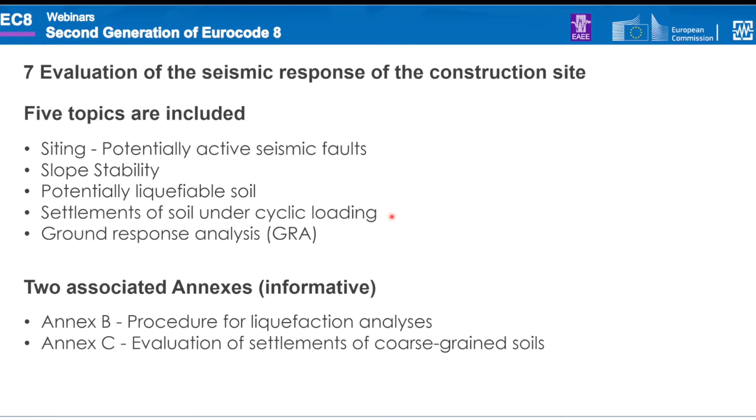So I start with siting, and I'm not going to read everything. This is a copy from version 2004. Skipping the principles, we have proximity to seismic active faults, which says buildings of importance classes 2, 3, 4 should not be constructed in the immediate vicinity of tectonic faults, and so on. But it just stops at that, and leaves it to the designer.

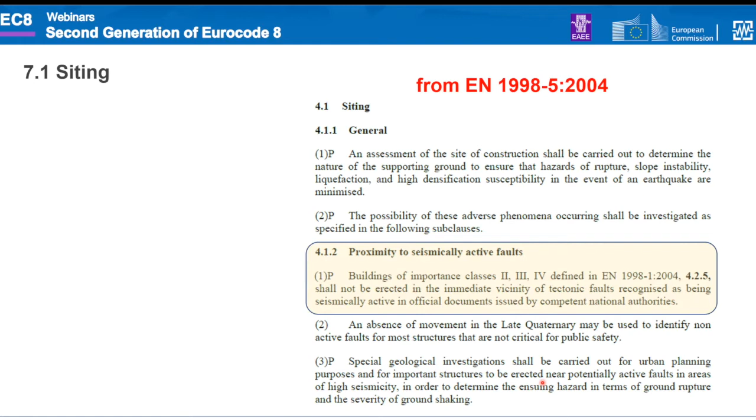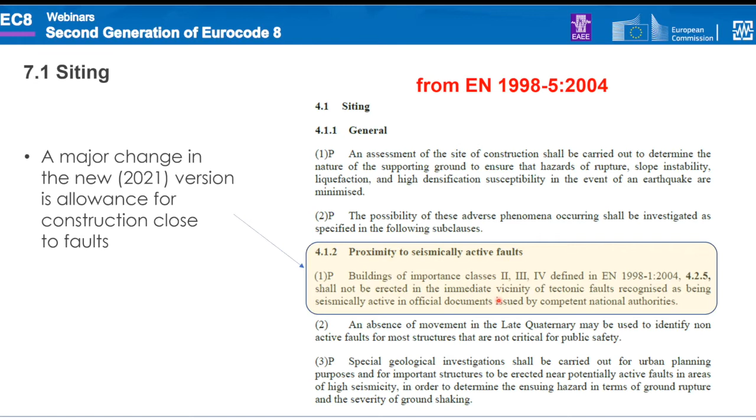There is a major change in the new version 2021 that allows for construction close to faults. One issue is the whole concept of active faults, which is the hazard part. This is dealt with in part 1 - what should we do if we are close. But that's the hazard part, the special seismic hazard studies and so on. Here we are talking about the foundation aspects of it. So what is done with respect to that?

Potentially active seismic faults - it says close to potentially active faults, roughly a few hundred meters. Structures of consequence classes CC2 and 3 may be constructed if there is a continuous stiff foundation and if there is enough soil cover. Then there is a table, a figure provided, with 3 curves, A, B, and C, each giving the thickness of the soil cover for low seismic action, moderate, and high.

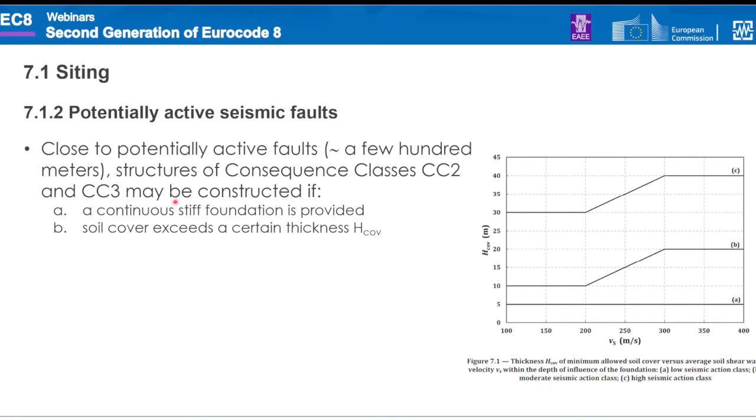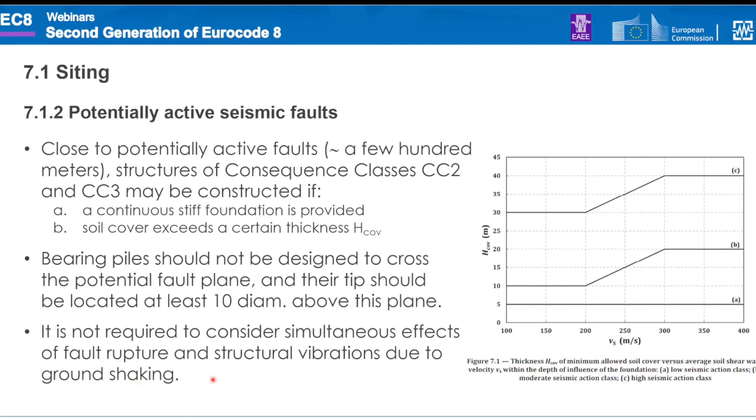So based on the shear wave velocity, one could decide what soil cover is required so that one could construct. Then it goes into more detail. Bearing piles should not be designed to cross the potential fault plane, and their tip should be located at least 10 diameters above. It is not required to consider simultaneous effects of fault rupture and structural vibration due to ground shaking. This is most relevant for underground structures, as we will see later.

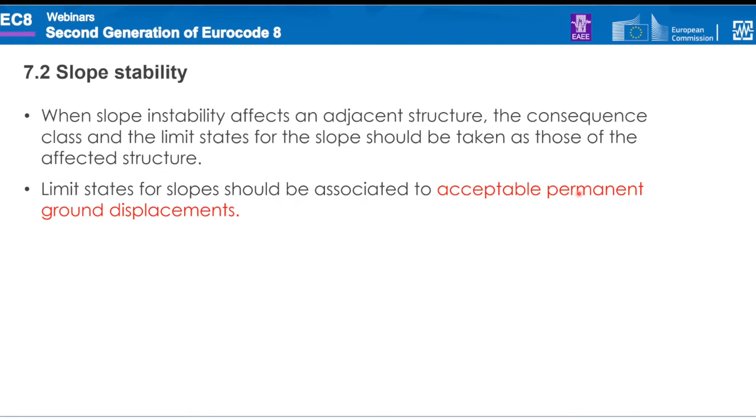Slope stability - the general concept is that when slope instability affects an adjacent structure, the consequence class and limit states should be taken as those for the affected structure. The limit state for slope is based on acceptable permanent ground displacement. Methods of analysis, as Professor Pecker explained, are the two: force-based approach and displacement-based approach. However, the force-based approach is allowed only if there is no danger of liquefaction or significant reduction of soil strength, so that means the only possibility is DBA.

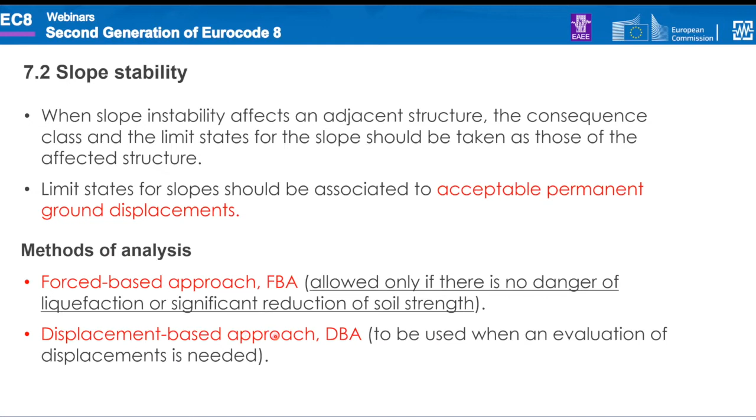The displacement-based approach is especially encouraged if an evaluation of displacement is needed - for example, if we need a certain amount of displacement with respect to a structure, then a specific number is needed for the displacement. Otherwise, one could do most of the things with the force-based approach, because as Professor Pecker explained, it has been very much detailed.

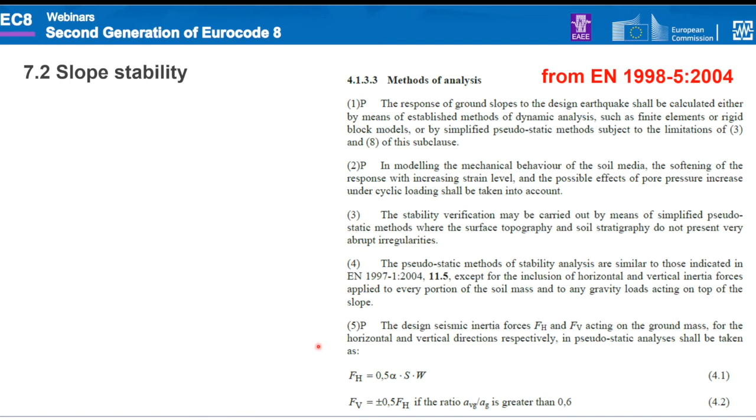If I look at what is in the current version, I'm just focusing on the major changes. Here we are following the same principle: the response of ground should be calculated based on two methods, FBA and DBA. They are not even under the banner of FBA or DBA, but both are mentioned, along with finite elements and pseudostatic methods.

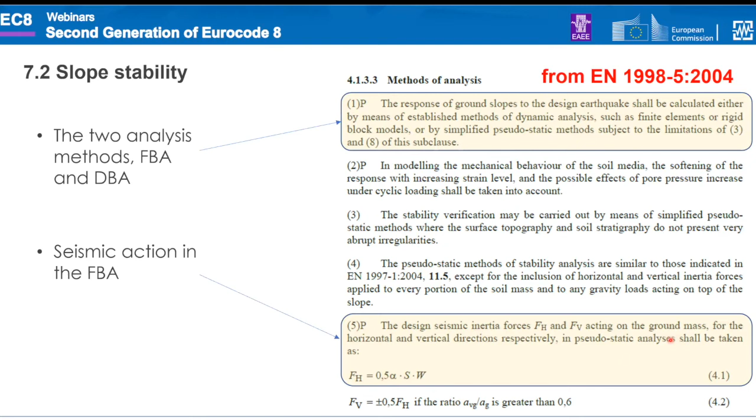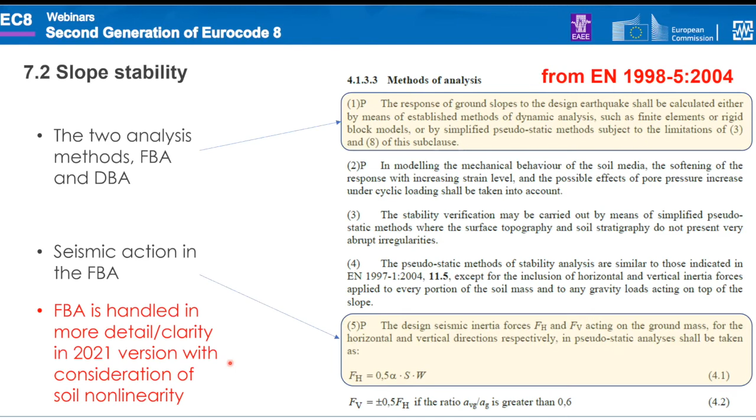For FBA, it comes through this simple expression for the horizontal acceleration, basically you take half of the seismic action and apply it to the slope. So in the pseudostatic approach, it's pretty simplified, very easy. This FBA is handled in more detail and clarity in the 2021 version, with consideration of soil nonlinearity.

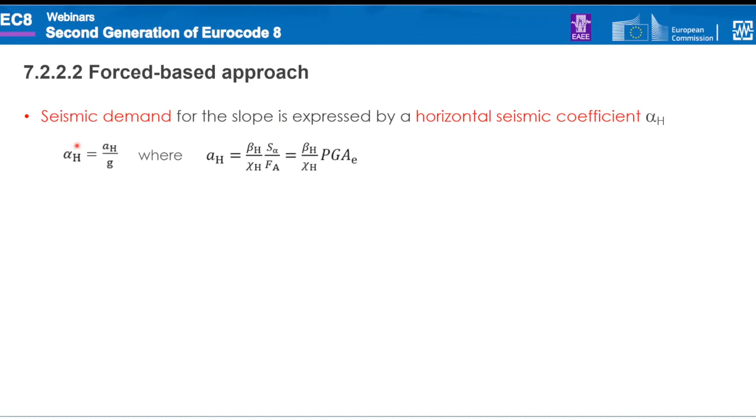Professor Baker explained it, I just add a few more descriptions. The seismic demand for the slope is the same horizontal seismic coefficient, alpha H. The acceleration is given, as already explained, as a peak acceleration times a factor beta H divided by chi H. That 0.5 is replaced by these two parameters, beta H and chi H, already described, accounting for soil nonlinearity. So that 0.5 has been replaced with more detail.

We performed some simple analysis to establish, for different limit states and consequence classes, what these factor chi H reduction factors could be. It varies between 1.5, 2, and 2.5 for these seismic classes, based on numerical calculations and empirical methods, for the displacement range that we set, typically 6 to 10 centimeters and so on, we arrived at these factors.

So that means, in addition to the beta H that is allowed, there is a possibility of reducing further for displacement. As Professor Baker mentioned, if we change the conditions for these limit states, we should go back and change these chi H values as well.

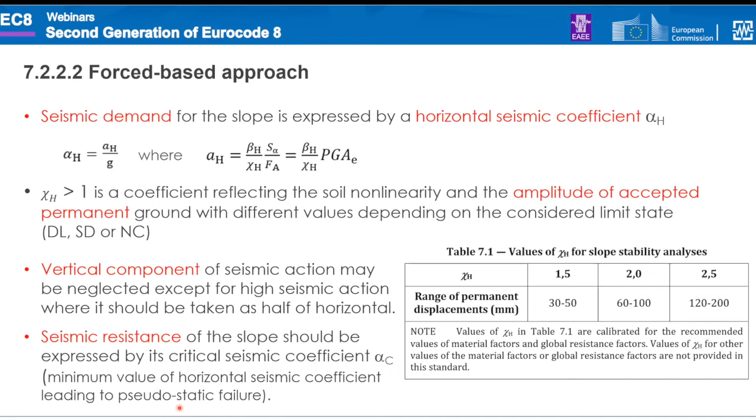So we have the seismic demand, which is basically the acceleration used, and then we have the seismic resistance, which is in terms of the critical seismic coefficient alpha C, the minimum value of horizontal seismic coefficient that could lead to pseudostatic failure. So it is these two versus each other.

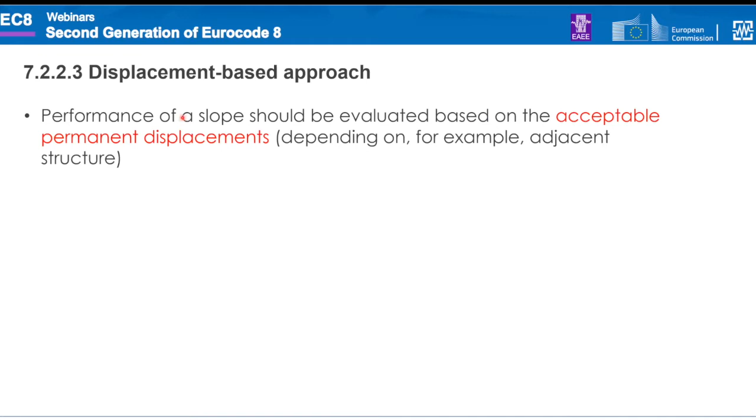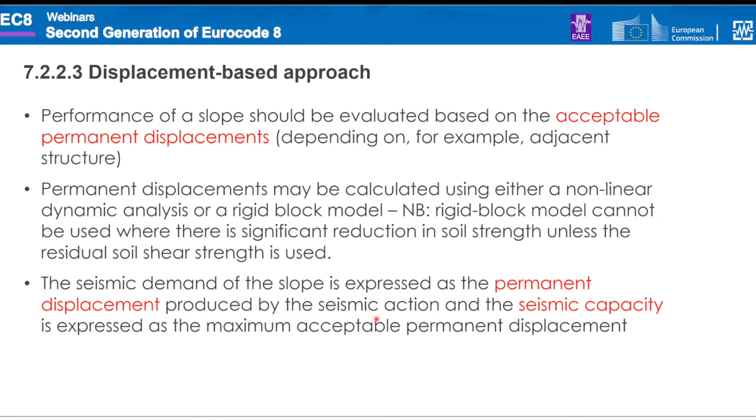In the displacement-based approach, performance of a slope should be evaluated based on acceptable permanent displacement. Permanent displacement may be calculated using, similar to before, nonlinear dynamic analysis or rigid block, but rigid block cannot be used if there is a significant reduction in soil strength. The seismic demand is again in terms of permanent displacement, and the seismic capacity is in terms of maximum acceptable displacement.

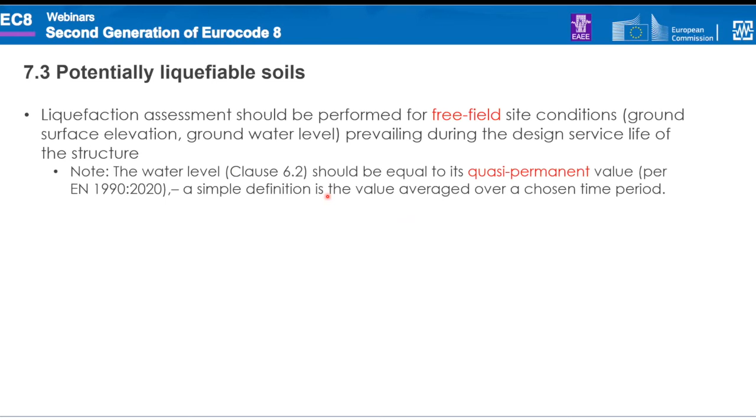Liquefaction, potentially liquefiable soil. Liquefaction follows pretty much the same principles, again much expanded, with more information from recent studies. Liquefaction should be performed for free-field conditions, and then there is the discussion of groundwater level, what groundwater level should be considered, consistent with the definition of Eurocode 0, based on what we call the quasi-permanent value.

This is a concept defined there, a simple definition for it would be an average for a chosen time period, or what is a dominant water level. So one does not need to consider it with a high rain season and things like that.

Susceptibility to liquefaction is well defined in Annex B, but at a high level it is defined as sand, gravelly sand, silts, mine tailings, and fine grained soil with plasticity index not greater than 15 should be evaluated for liquefaction susceptibility. Soils with clay fraction greater than 15% are not considered liquefiable. Liquefaction assessment may be neglected for magnitude smaller than 5.

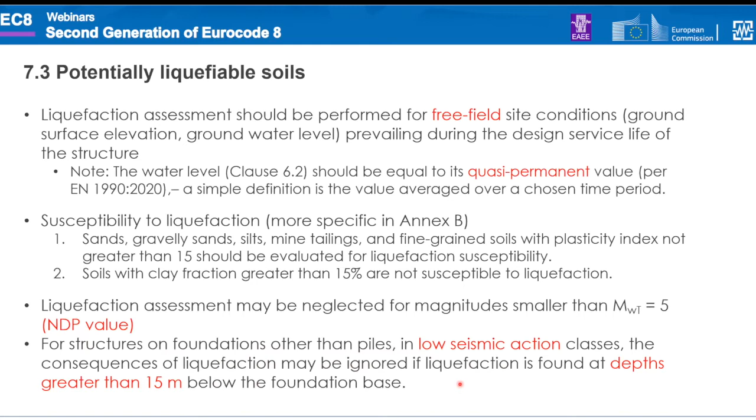This is an NDP value that can be changed. This is one of the advantages of the current version, more allowance and relaxation for low seismic actions, which comes up in different parts. For structures on foundations other than piles in low seismic action, the consequence of liquefaction can be ignored if liquefaction is found at depths greater than 15 m.

The assessment itself is the classical way, I'm just covering it for completeness and in case the material is distributed. It's in terms of the cyclic resistance ratio, pretty much the classical way, however, no reduction for beta H or chi H, so they should both be taken as one, in other words.

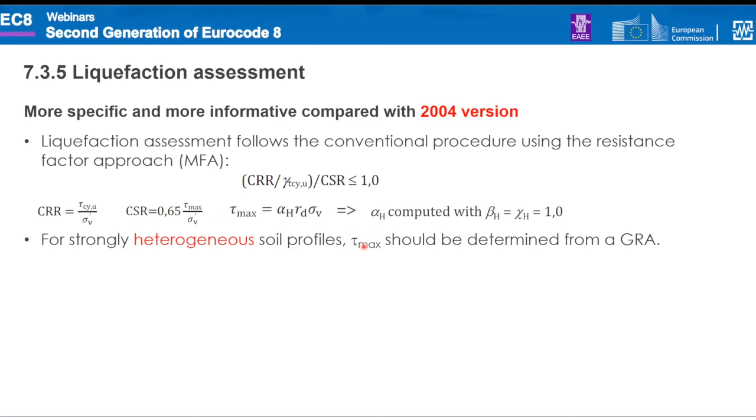This is an additional consideration for heterogeneous soil profiles, like when we have stiffness contrast more than 3, the tau max, the maximum stress action, should be determined from a ground response analysis. CRR should be evaluated using SPT, CPT, the same as before, in a very detailed way based on the most recent established method available.

It has been put in Annex B, and one is allowed to take all the permitted factors to correct for that, like earthquake magnitude, effective overburden pressure, fines content, and all the like. Annex B is informative, very detailed, it's there.

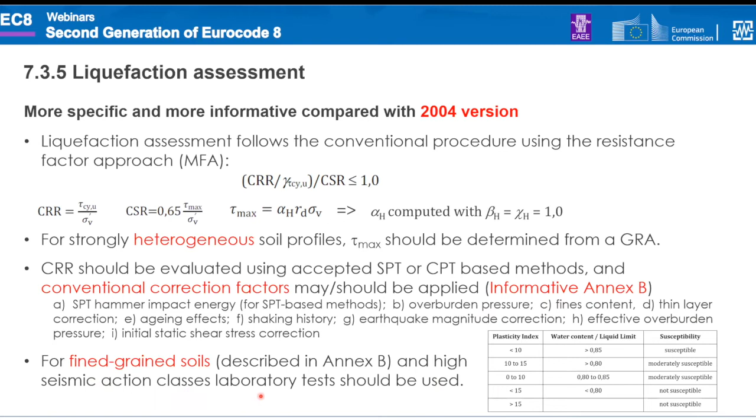For fine-grained soil, there is actually a laboratory test that should be performed, and this is the condition for how a fine-grained soil is considered susceptible in an annex. So there is extra information on liquefaction assessment.

This is also new for low seismic. If soil is considered liquefiable, then what should we do? For low seismic action classes, liquefaction may be assessed using a simplified liquefaction index method, which is in Annex B, based on this liquefaction severity index method.

For moderate seismic action, the consequence of liquefaction may be assessed using a combination of simplified method and free field settlement. Annex C gives the procedure for estimating the settlement. For high seismic action classes, potential consequences should be evaluated numerically or based on empirical methods.

One should think about exceedance of load-bearing capacity, where you should use residual strength, and instability of foundation, again residual. Settlement and differential settlement of structure is discussed in Annex C, and lateral spreading should all be considered, with Annex C providing some methods.

Liquefaction remediation, I'm not going through it in detail. There is a good section on it, section 7.3, that explains how to do ground improvement, how to assess it as acceptable, the use of piles, and what we should think about with piles.

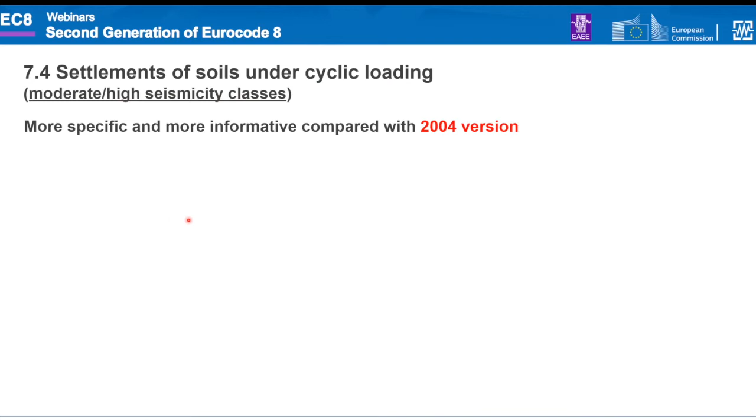Settlement of soil under cyclic loading is considered only for moderate and high seismicity classes. There is more information compared to the 2004 version.

Susceptibility of unsaturated loose coarse-grained soil can be, and densification can be evaluated. This should be evaluated, and there is an Annex C for it.

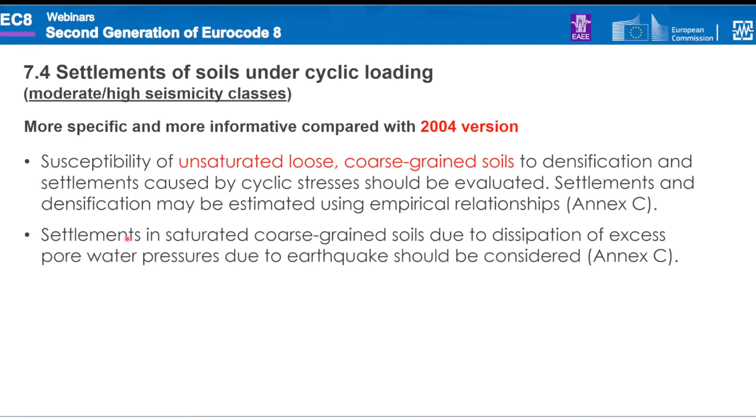Settlement of saturated coarse-grained soil due to dissipation of excess pore pressure, again due to earthquake, should be considered. Annex C has a section on it.

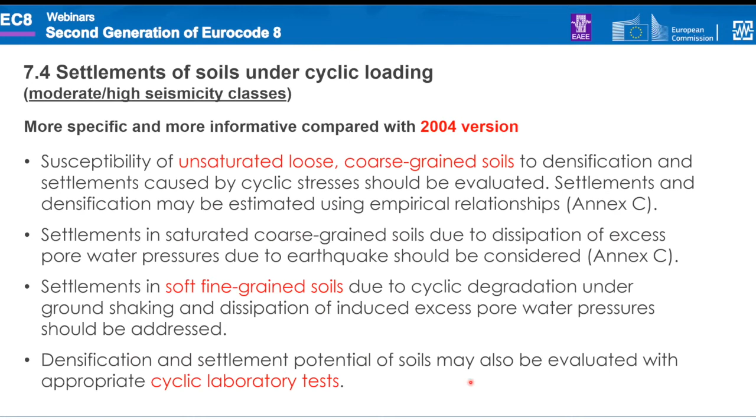Settlement of soft, fine-grained soil due to cyclic degradation should also be considered, due to dissipation of induced pore pressure. Finally, densification and settlement potential of soil may be evaluated with appropriate cyclic laboratory tests.

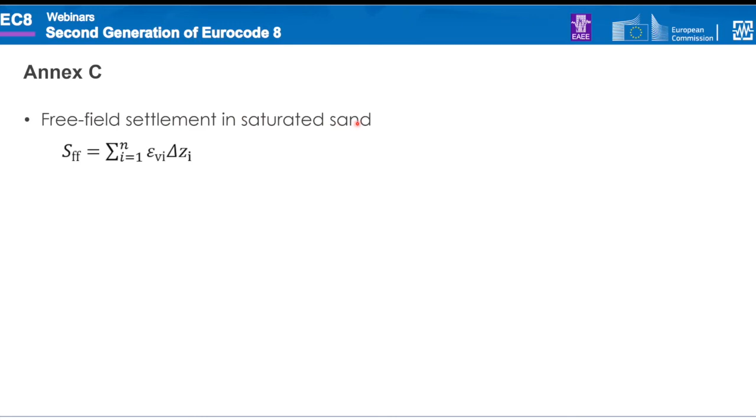Just to give you a flavor of Annex C, there is, for example, free field settlements in saturated sand based on the volumetric strain and the summation over depth, with different methodologies for evaluating this epsilon V based on safety factor against liquefaction, based on CPT, based on SPT.

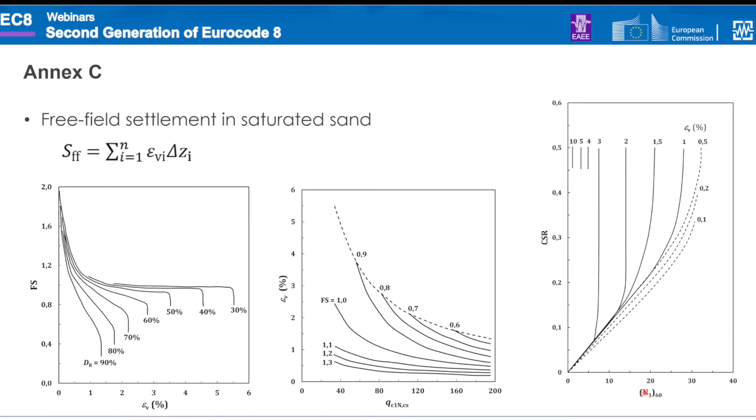These are all basically taken from available literature. For settlement under building, there's also guidance on how much displacement, based on some formulas available, again informative, with some curves all included. And for lateral spreading, the same.

An equation is basically copied from the most recent studies, and these, again, are all informative.

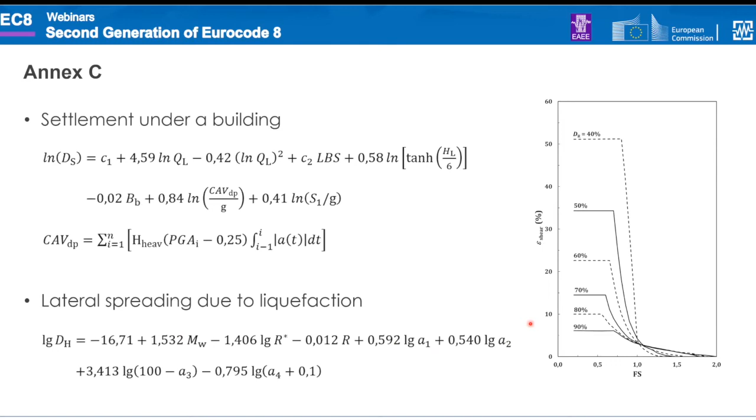Finally, site response analysis. There is a good section about it in Part 1, so what is actually in Part 5 is mentioned. It says when relevant conditions apply. Relevant in Part 1 means, for example, the condition is such that it's not covered by Eurocode Part 1, so then we are expected, or allowed, to perform site response analysis.

Then we could use that to get the time histories needed for retaining walls and underground structures. Soil structure interaction could be done from GRA, ground response analysis, and of course using, for example, the conventional total stress method, with all the principles of damping and shear modulus reduction.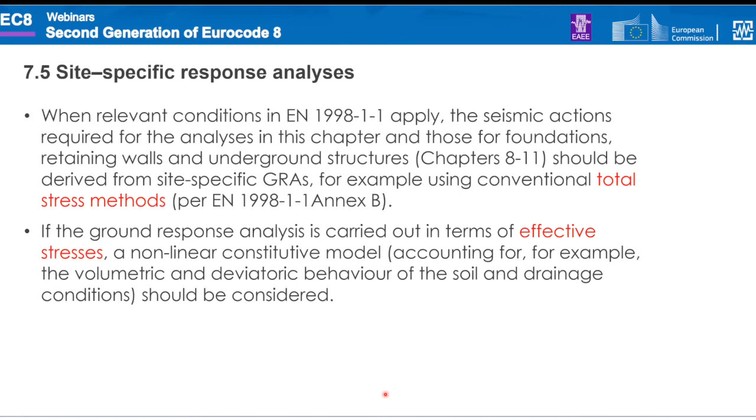One is also allowed to perform ground response analysis based on effective stress methods, nonlinear constitutive model accounting for volumetric deviatoric behaviour. So both methods, rigorous, are possible, provided that the conditions are there. This is a little bit new in the current version.

Thank you for your attention.

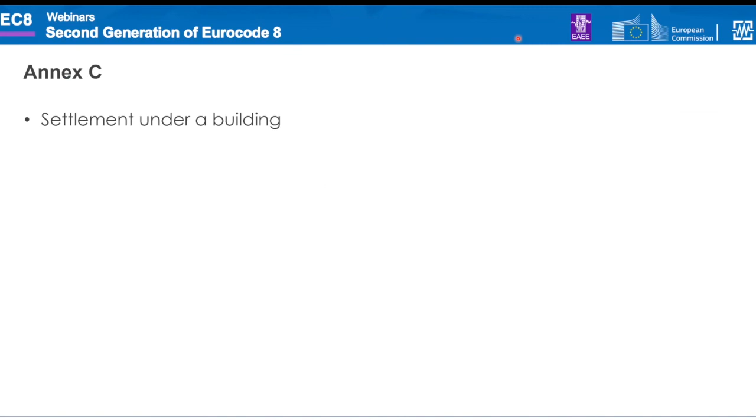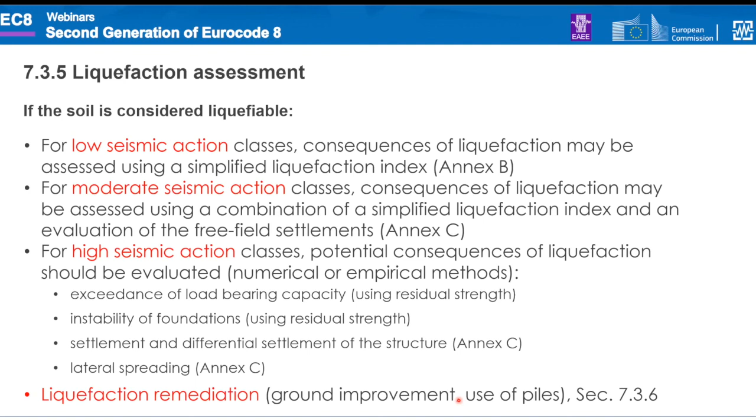Thank you very much. At the end of the day, it is the engineer, because these are general guidelines - we should realize that we are not completely taking it from them. The purpose of the code is to give that flexibility and give more guidance as to what to watch out for and what to avoid. Thank you very much for your kind answers, and thank you very much again for the presentation today.